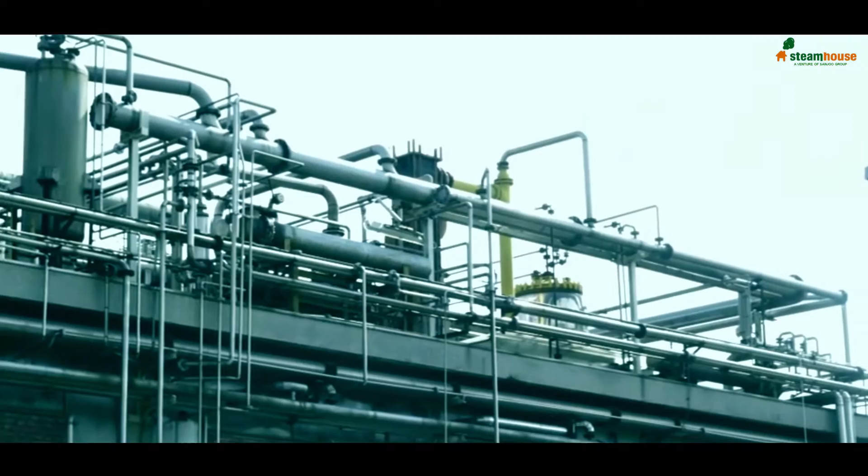Since the earlier days of the Industrial Revolution, steam is used to power machinery and also used as a medium of distributing heat. Today, the excellent heat transfer properties of steam and the ease with which it can be distributed and controlled have led to its wide impact in industries both big and small.

SME clusters in our country today are dotted with a large number of small boilers and chimneys. The use of steam in industries is so widespread that nearly half of industrial fuel consumption goes to the generation of steam.

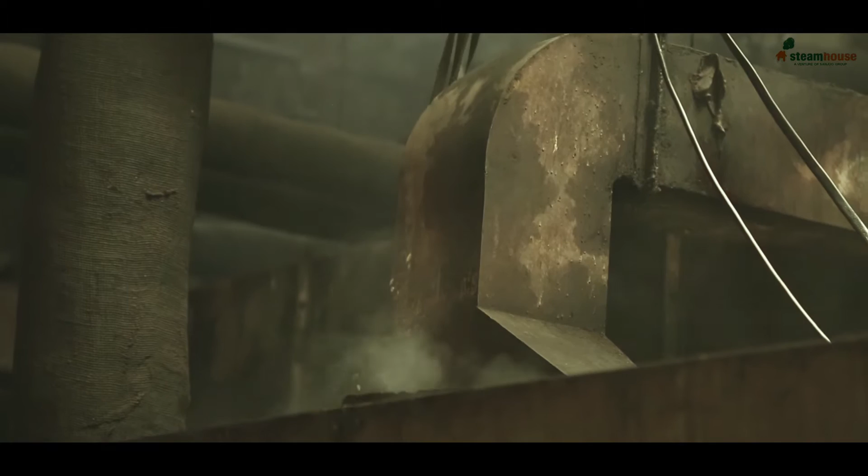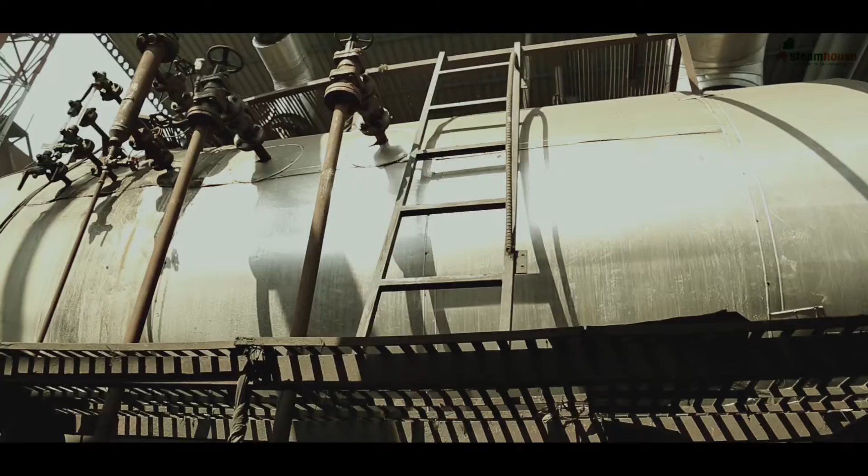This has led to very adverse effects on the environment, as most of these small boilers are without state-of-the-art emission control systems and lack operating efficiency. That is resulting in excessive pollution of our environment, wastage of precious fuel, and various occupational health problems to the population exposed and living nearby. Not only this, even safety practices and protocols are not maintained scrupulously.

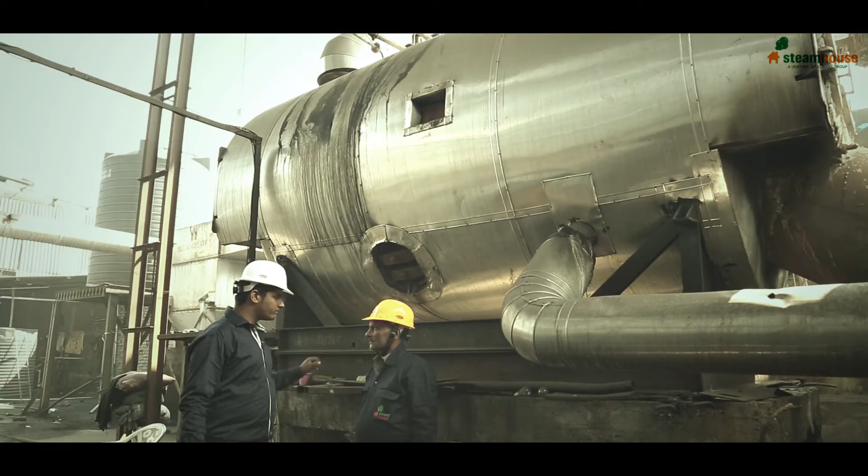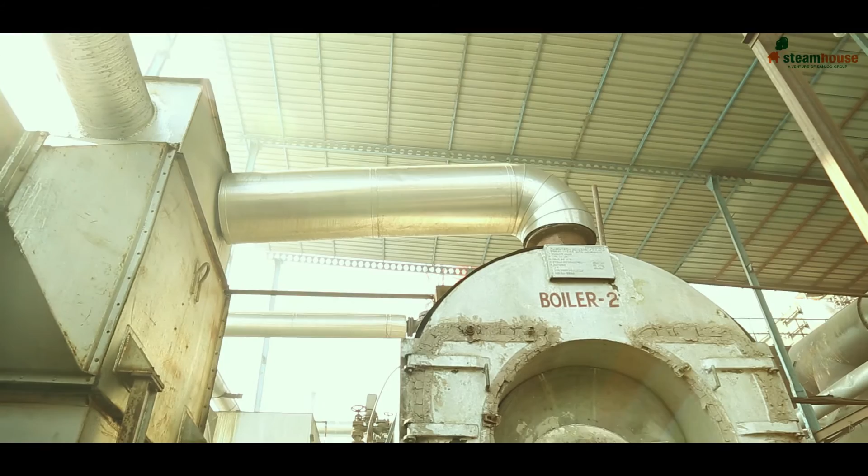Our today and tomorrow demands that this steam, which is so precious to the industries, is produced with minimum effect to the environment in terms of pollution, and also improves fuel efficiency. Steamhouse understands this and has designed its new project of steam generation and distribution to reverse the environmental damage caused by these small boilers, and also to improve safe working conditions for workers in SME clusters.

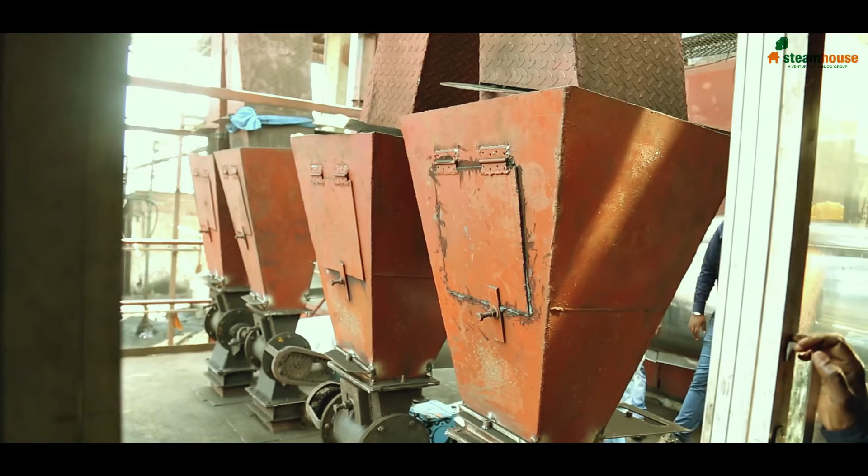Steamhouse today has embarked upon a mission of installing large, efficient community boilers with state-of-the-art emission control systems, and to generate as well as supply the required steam to respective industrial units through modern pipelines.

Steam house means steam generation. This steam generation is for the purpose of delivering to the adjoining small industries. Every industry has got their own small boiler, but pollution control equipment is relatively not there. Because of that, whatsoever flue gas is discharged into the atmosphere contains particles and heat also. The reliability of those boilers is relatively less, and so they immediately go on to affect their own organization.

In this project, we are having backup from the Gujarat Pollution Control Board also, because they find this is one of the prime projects where pollution could be minimized.

Steamhouse benefits include reduced air pollution. It is easy to monitor for the State Pollution Control Board. It has increased safety in the estate. It allows industries to save space for more production, and increases humanity by providing safe working conditions.

Steamhouse is a project by Sanjog Group of Companies, a textile company established in 1978.

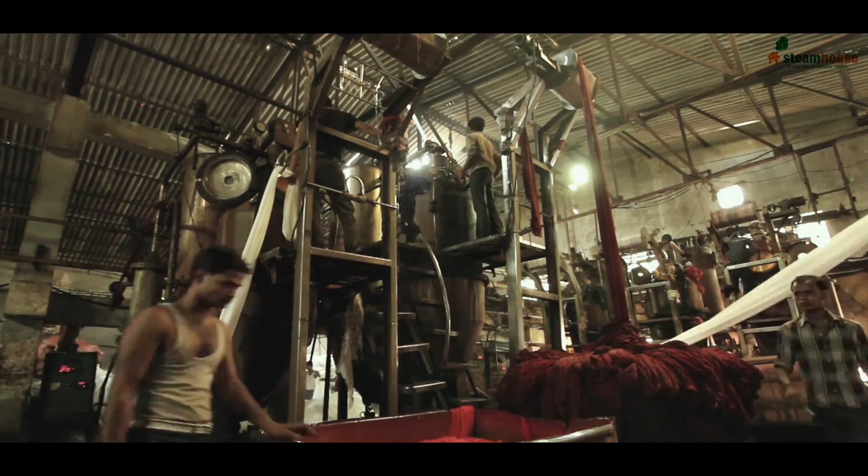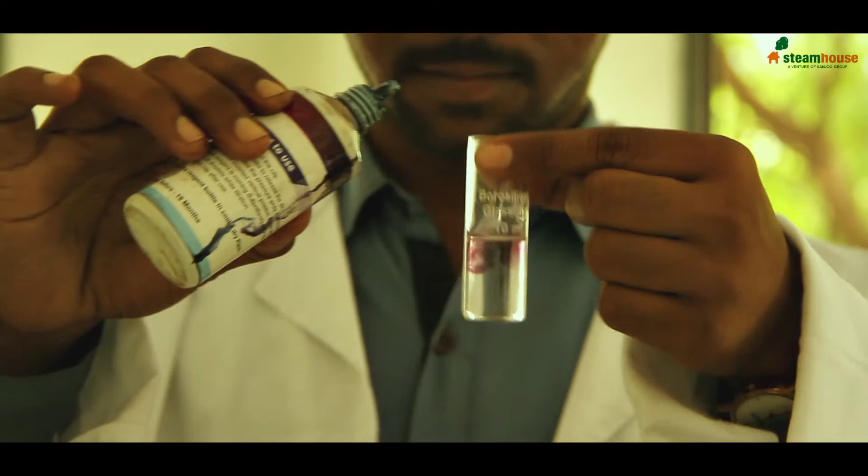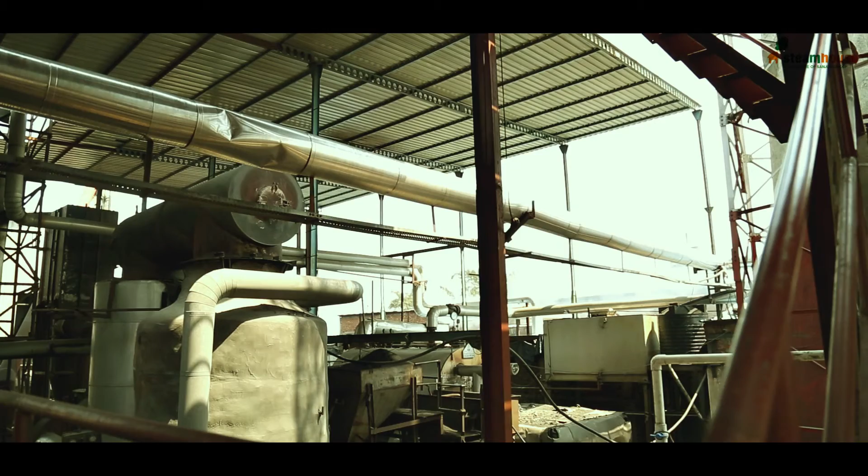To keep tab on the quality of coal received, raw water and boiler feed water, an in-house laboratory is functioning, where the latest state-of-the-art computerized laboratory equipment is present. This helps in maintaining steam quality and monitoring boiler performance. As per the comparison done between the conventional project of steam generation and Steamhouse, we have come up with certain parameters.

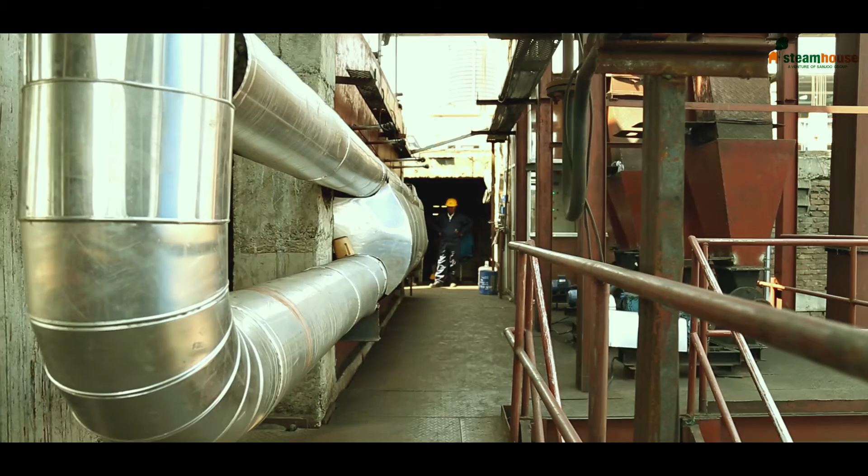Steam House is going to be India's first community boiler company. The boilers will run on a fluidized bed coal-fired system. Here the efficiency would be high, and the safety would be high.

We will have cross-country steam pipelines spreading in kilometers. They'll all be on steel structures of 8 meters height. We have a 24-hour safety team to handle all kinds of emergencies with a proper communication system.

Our target is to do it in several clusters all over the country, to help industries grow with us with a proper sustainable environment without hurting the environment.

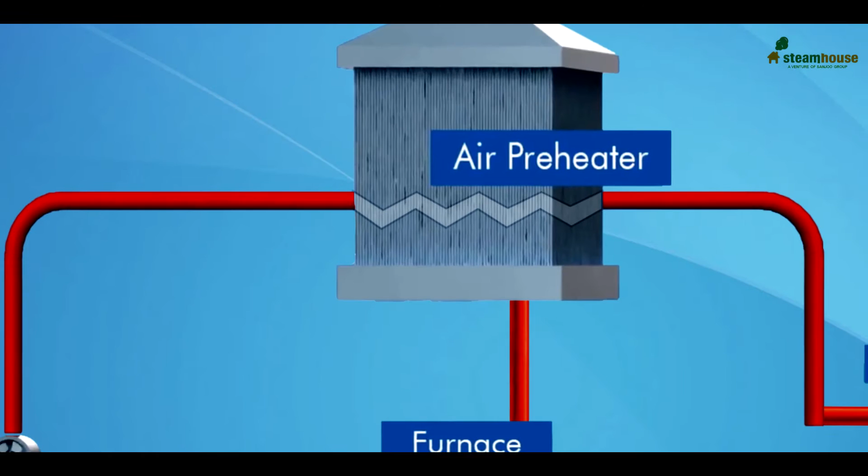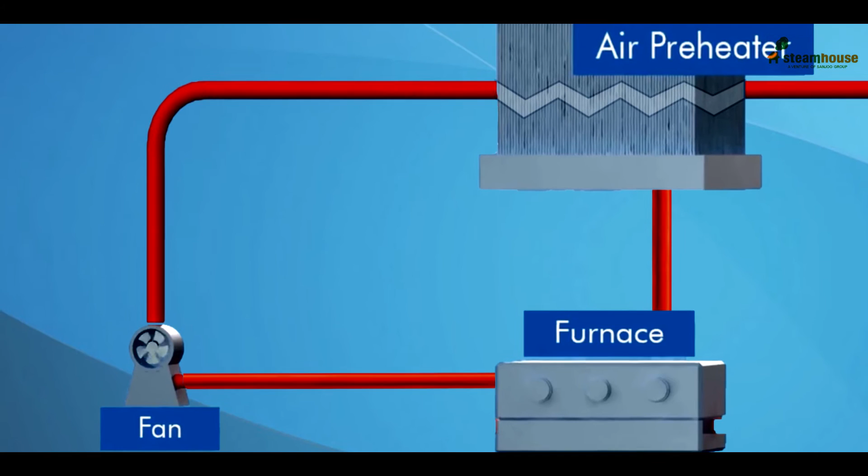To ensure total combustion of the coal, highly efficient large capacity boilers based on fluidized bed boiler technology are being installed. The fuel will be burnt at a controlled temperature of 760 to 930 degrees Celsius to prevent nitrogen oxide from forming.

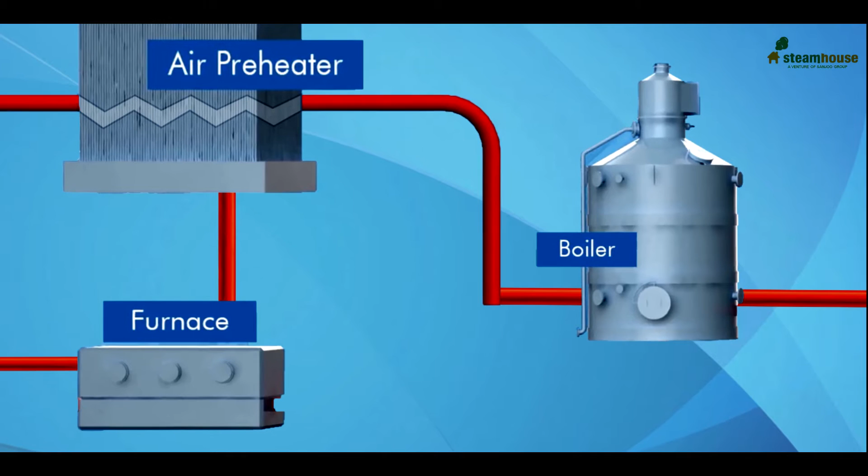To check the escape of SO2 into the atmosphere, sulfur-absorbing chemicals such as limestone or dolomite will be injected to mix with the fuel particles in the fluidization phase, which will absorb almost 95% of the sulfur pollutants.

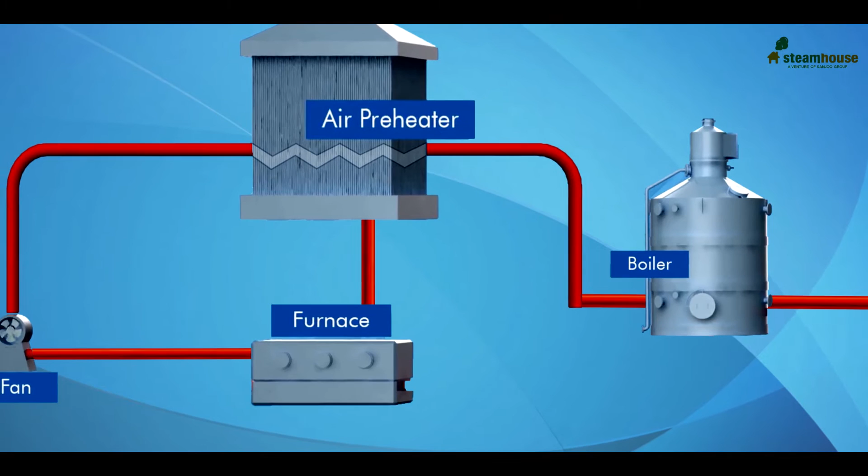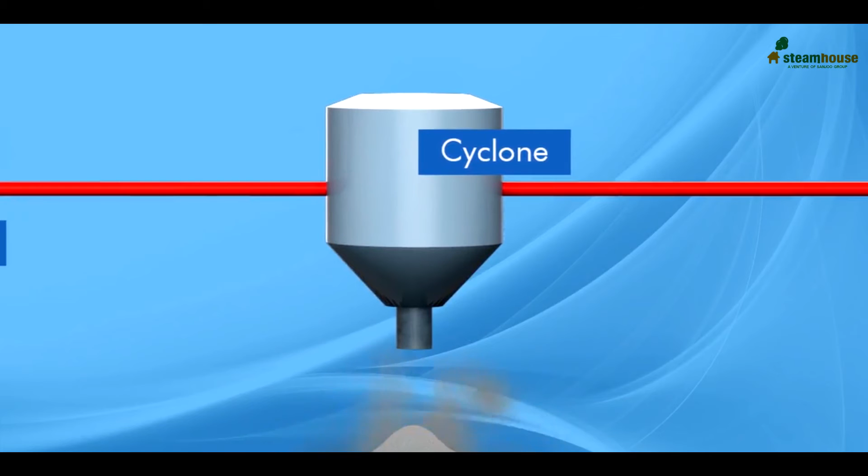Fine particles of partly burnt coal, ash and bed material are carried along with the flue gases to the upper area of the furnace and then into a cyclone. In the cyclone, the heavier particles separate from the gas and fall to the hopper of the cyclone. This returns to the furnace for recirculation.

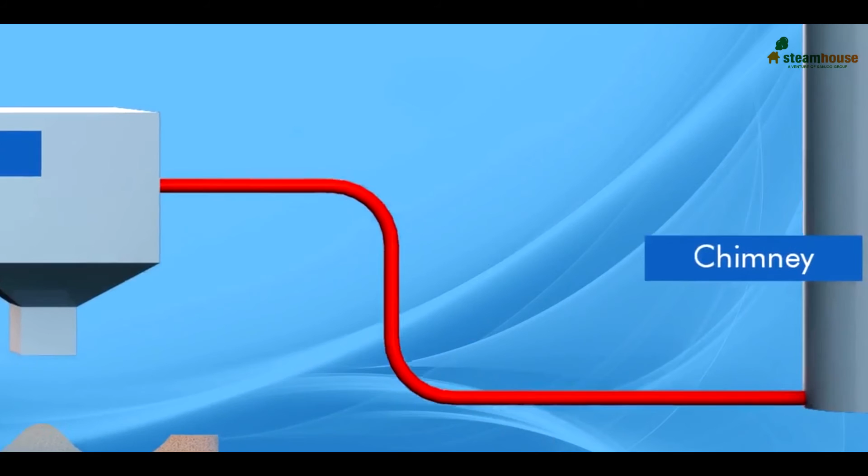For further elimination of residual pollutants, electrostatic precipitators would be installed. In addition, an air preheater to recover and productively use the heat from the flue gas would be installed prior to the cyclone separator. This would also reduce the temperature of the flue gas emitting into the atmosphere.

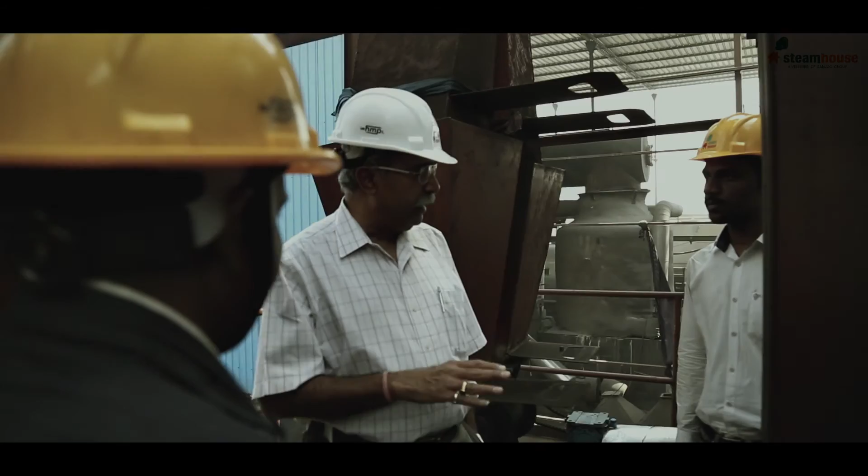The project runs under the supervision of highly skilled and trained professionals, taking care of each and every aspect regarding steam generation. The air pollution control measures are properly taken care of, as the guiding principle of this project is to help the environment regain its original state.

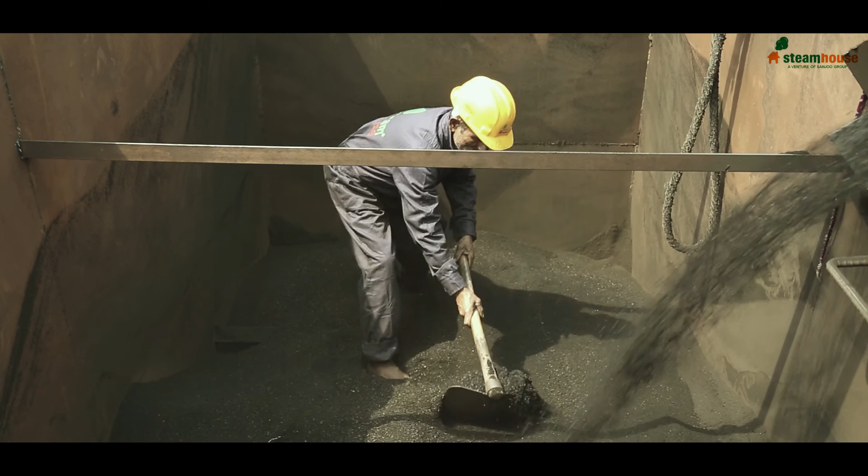Steam House. Because let us grow together.